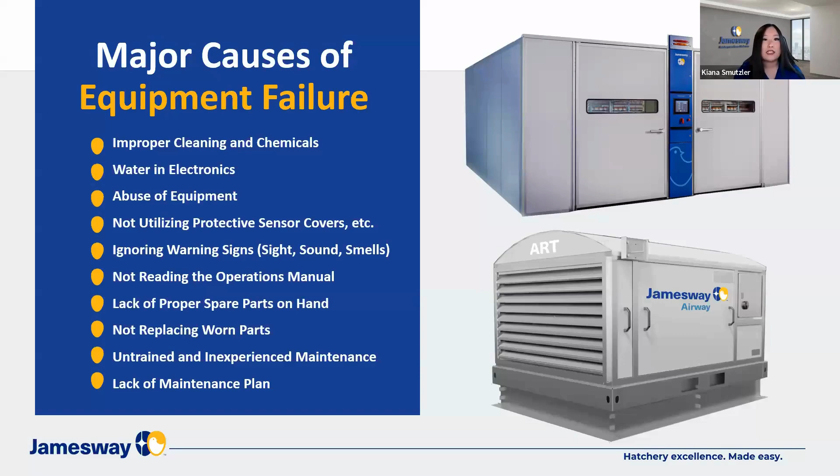With that, not only is there potential for a significant financial impact to the business, but there's also a higher likelihood of damage to chick quality and hatch performance when some of those issues take place. From a financial aspect, we're looking at costly service visits, rushed part deliveries, sometimes leading to staff overtime and operational inefficiencies because these problems take place during operational hours.

And what those inefficiencies and that downtime really feed into, that we are really trying to prevent every hour of the day that we're at the hatchery, is compromised chick quality and/or the loss of hatchability.

This can lead to unplanned outsourcing costs for day-old chicks or general incubation services so that we can be meeting the needs of customers. Unplanned outsourcing - the empty machine may force a hatchery to go elsewhere to find day-old chicks or hire incubation services, really leading to those unexpected expenses.

And with this, we cannot guarantee 100% that there's not going to be bouts of downtime, but what we can guarantee is significantly reducing this with a proper maintenance plan. So what I'm going to go into is what we see most commonly: we have reactive maintenance and preventative maintenance, which I'll touch on in just a second.

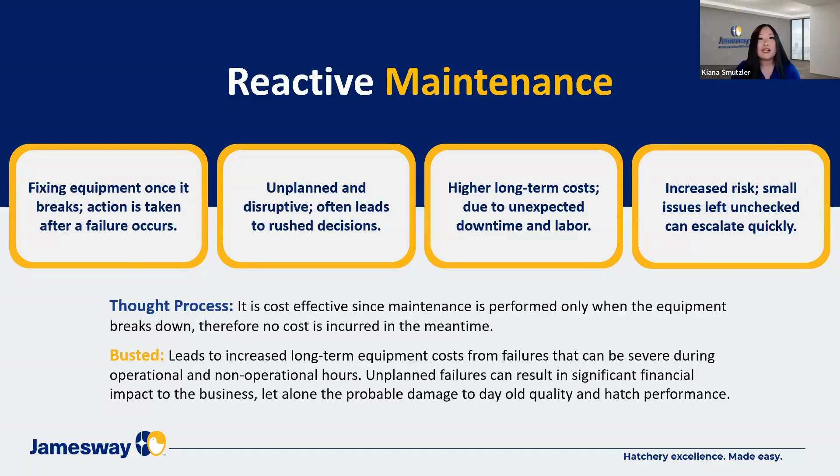Generally, what I have been told by customers is that it is more cost effective to do reactive maintenance. They will say, we do reactive maintenance and we are proud of it, because maintenance is only performed when the equipment breaks down. So we're not incurring costs in the meantime, which means it should be more affordable.

Unfortunately, what I think we're failing to see is the long-term damage and the costs that are racked up when that equipment does break down. I know that we're maybe not tracking it to the same degree, but really what this means is it leads to increased long-term equipment costs.

Not only from the failures that can be severe during both operational and non-operational hours, those unplanned failures can result in significant financial impact to the business. So we're thinking, oh, it only happens every now and then, we're not incurring that much cost. But even if they are periodic, that time when equipment goes down can have devastating consequences, let alone the probable damage to day-old quality and hatch performance.

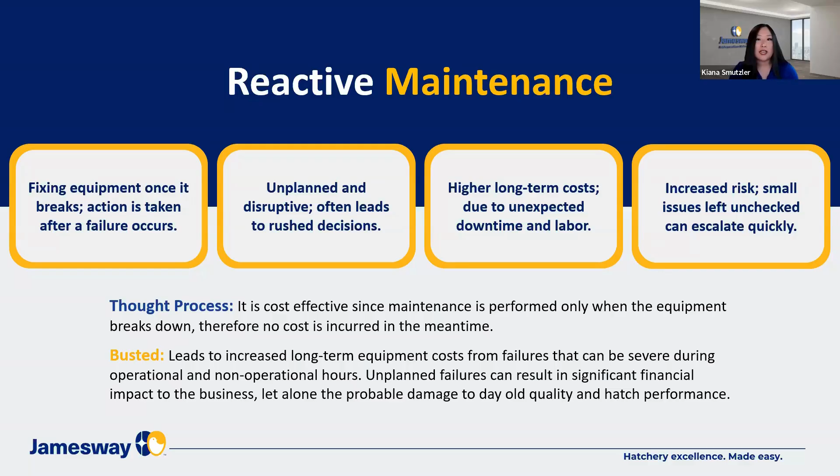So what can we do instead? For a majority of today, we are going to be talking about preventative maintenance. This means having routine checks and servicing performed on a scheduled basis. It reduces unplanned downtime and allows you and your teams to identify and address issues. So what we're looking at is extending equipment lifetime, preventing premature damage that could be prevented, and improving consistency, which supports both performance and reduced stress for you and your team.

Preventative maintenance is important. We do have a generational change in management, maintenance, and general labor taking place at this period of time, especially across North America. Specifically, we see multi-stage incubation equipment that is over 45 years old on average. So these machines, they are great, but they need a team to be able to support them like all things do.

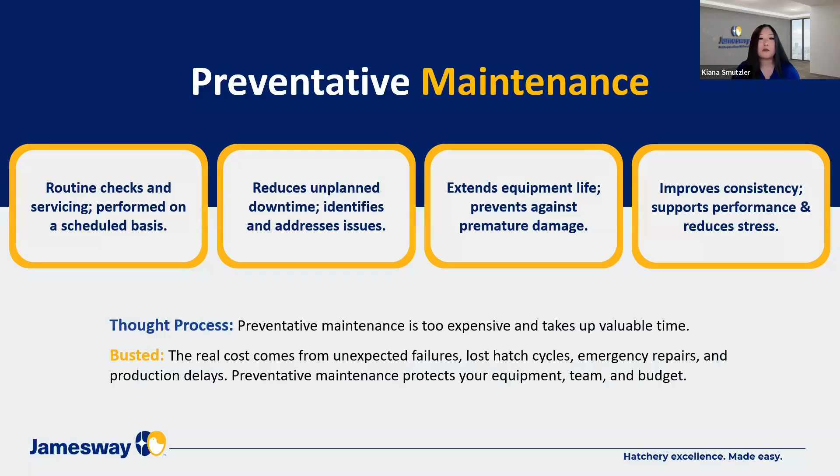The thought process with preventative maintenance, what I've heard from customers all over is, well, preventative maintenance is too expensive, we have to hire on someone just to do that, it takes up valuable time. But really, the real cost comes from those unexpected failures, the lost hatch cycles, the emergency repairs, and those delays in production. So what we're going to do with preventative maintenance is show you how you can implement small changes to be able to work towards a strong preventative maintenance program to protect your equipment, your team, and your budget.

So with this, we're going to go over a high-level overview of some preventative maintenance aspects and features that we can begin implementing. Again, this is from a high level -- we do have a variety of equipment, different ages, different teams, different skill sets. So afterwards, absolutely reference some of the materials I'm going to mention, like the manual for your specific machines. We also have support teams here at Jamesway, myself included, and Mike and Ronald and our consultants. We have so many great and strong, knowledgeable teams, so we can help get this down to something more exact for your facility.

Let's look at general preventative maintenance and how we can build that in. First, with incubators, after every set and wash, there are general checks that should be done, including calibrations like CO2, temperature, humidity, etc.

Along with that, perform regular checks on the machine by manually activating different systems—heating, cooling, opening and closing those dampers, checking your alarm systems. It's not something you need to spend 10 minutes on each item, these are pretty quick checks.

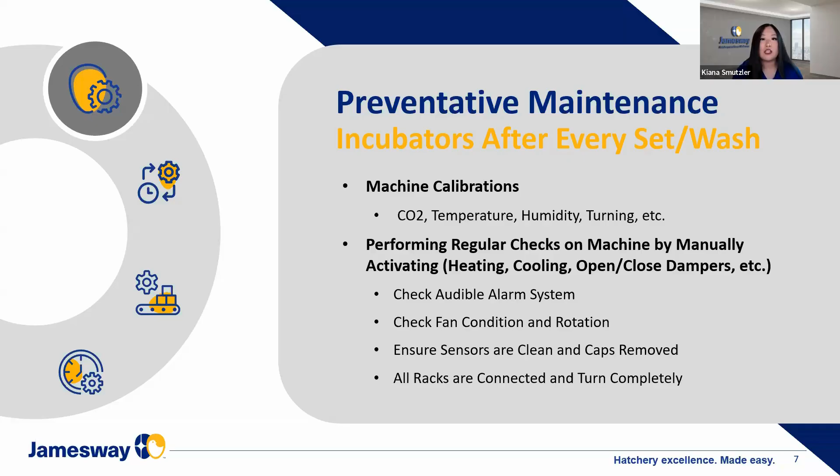But again, getting your hands on and seeing that machine matters. We want as much face time with that machine as possible, so that when something is out of the ordinary, we understand what normal should be. So just some general checks here with the incubators, regularly after every set and wash.

When we go to our hatchers, we're looking at this from a monthly perspective. But the one thing I really want to point out is the door gasket condition—that's weekly. They should be inspected weekly because they're subject to so much use. With transferring, hatching, and cleaning twice a week, they are more likely to become worn. That tight door is crucial for maintaining the necessary temperatures and humidity levels within the hatcher for optimal development and hatching.

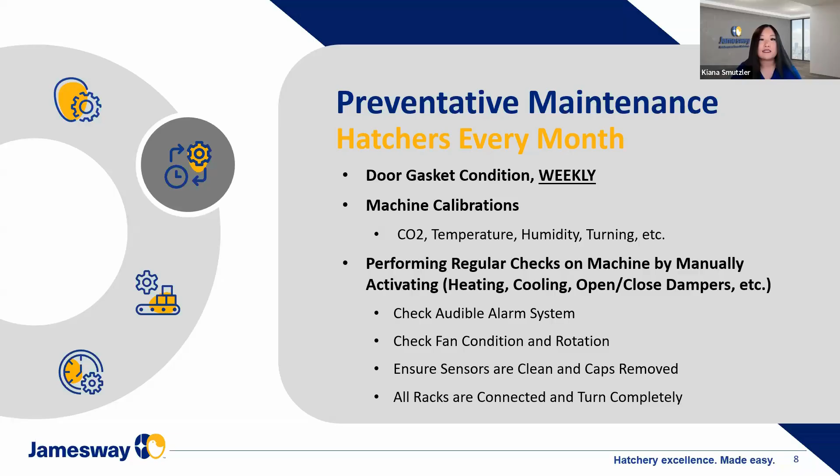Everything else here is pretty standard, similar to what we'd recommend for the incubators. But again, on a weekly basis we should be checking that door gasket condition, making sure we're getting a tight seal on our hatchers.

We should also be doing preventative maintenance on both of these machine types on a quarterly basis, so about every 3 months or so. Being able to schedule these out and spread it through the week or month can make some of these items more attainable.

I know you might think, oh my gosh, doing this every quarter, I have to do this report, we have to do this. But there are small, practical ways to build this in by spreading it out and planning it out, so we're not dealing with something unexpected that takes up a much more significant amount of time and resources.

Before doing any work with our control box, make sure the power is switched off, then get in there and analyze—is everything clean? Is it dry? All of this can have different impacts on your machines.

When we start doing this consistently on a regular basis, you'll see it doesn't take that much time to do these checks. What takes longer is if we only get to it every year, or every couple years, or whenever we have to—that's when we see a lot more buildup, more control boxes that need cleaning, or more significant damage that takes up the bulk of your time.

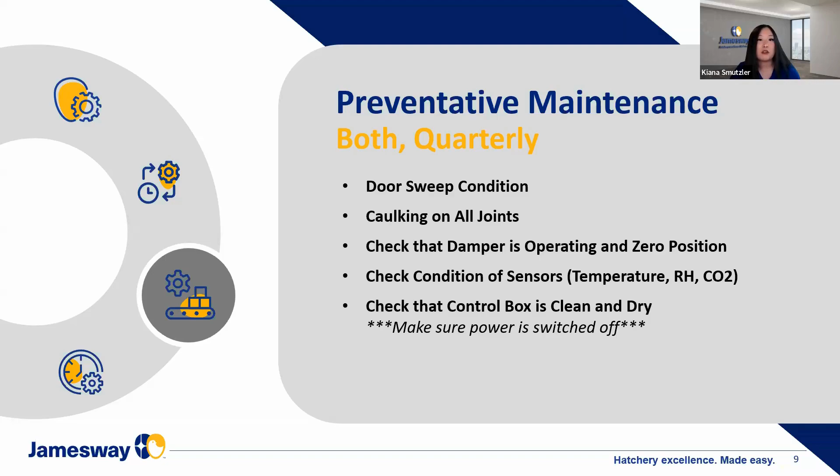But as we stay consistent, going into semi-annually, about every 6 months or so, let's make sure the doors are latching properly, and get a little deeper on some of these checks—testing our water quality at the hatchery, making sure the pivot points on the trolleys are greased and oiled, and doing a full technical check.

According to those manuals, we have those for all of our different machine types. If that's something you don't have, maybe you lost it and don't know where to find it, please reach out to our team. We'd be more than happy to provide these manuals for your specific machine types so we can get more exact on what those checks should be and what this maintenance program should look like for you.

Today we're going to talk a little more about the setters, the hatchers, your HVAC equipment, but all preventative maintenance should be done on a regular basis, also for automation and for all of the different equipment that is in the hatchery.

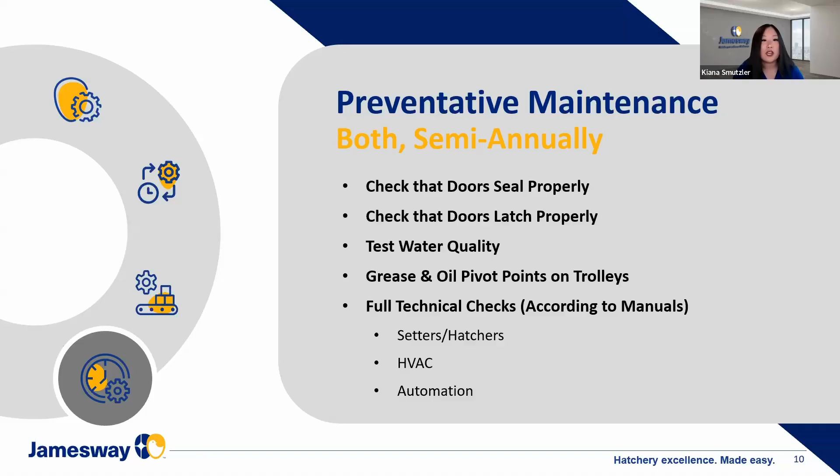So I'll go a little bit more into specifics on what we can do for you, but just keep that in the back of your mind. We should be building in programs for all of our equipment to make sure we don't see any issues. So now we're going to start breaking it down a little further.

What are some large key steps that we need to do to begin a preventative maintenance program? This might be if you're starting from nothing, if you come in and say we sit there and wait, and then when something happens we go address it, with nothing being done in the meantime to set ourselves up for success. So let's go through this.

First, we need to take an inventory of that equipment. Create a full inventory of all the critical equipment and the parts that go with them. Review knowledge of your service history - if you have anything down on paper or in your computer, that service history is extremely important, especially with the long lifetime of these machines, so that you can prioritize focus areas for where that preventative maintenance should take place. But overall, let's get an inventory taken down of our equipment and our parts.

Next, we're going to develop checks and routines. We're going to build a structured plan based on daily, weekly, and seasonal tasks, similar to what I just spoke about - using manufacturer guidelines as a starting point, and then being able to tailor it to your specific conditions and needs. Every team, every facility is a little different, so use this as a guideline, but not everything has to be structured exactly as we outline it. You have a little bit of flexibility to work this into what is most practical for you.

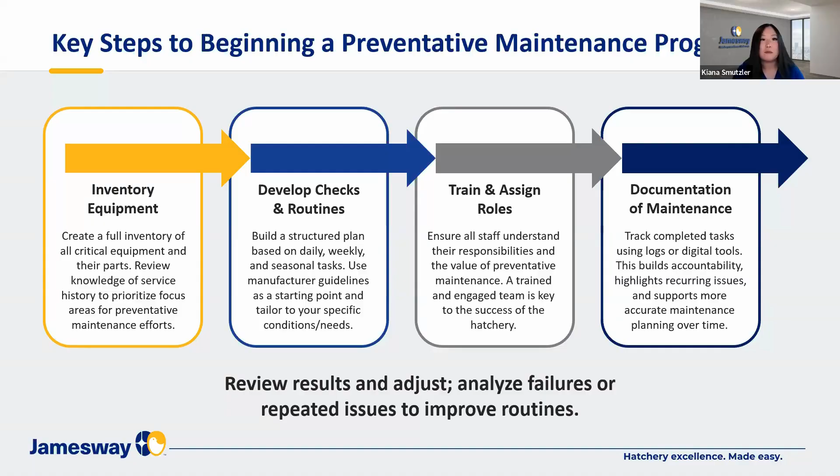Again, just following a piece of paper and saying, okay, that's preventative maintenance - you're not going to see the full benefits. We really have to build this into our day-to-day, and sometimes we need to pivot and say this piece of equipment needs more attention, we should be doing this every 2 months instead of 3 with certain items. Being able to customize this to you is critical in building something that's really practical and lasts you the long term.

Unfortunately, they're going down at 2 a.m. They're going down on Christmas. They're going down at these unpredictable times. And the last thing we want is for it to be a quick spare part change and we don't have it, or we don't even know where it could be found.

Really reliable hatchery operations depend on quick access to the correct parts. Even minor delays in replacing a failed component can lead to unplanned downtime, interrupted hatches, emergency repairs, lower chick quality, and have a high impact on hatchability.

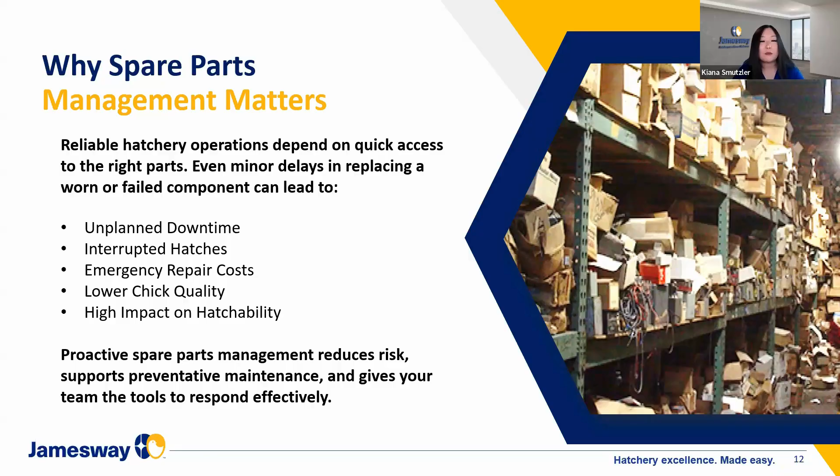Even if you come to us urgently needing something shipped out as soon as possible, and we get it turned around next day, that delay when the machine is down, especially with eggs in it, can have devastating consequences. So proactive spare parts management reduces the risk, supports your preventative maintenance program, and gives your team the tools to respond effectively.

So what are some of the best practices for spare parts management as a whole? It begins with simple, consistent habits. First, we organize our storage—designate a secure, organized storage area for your parts so we prevent damage or loss of these items.

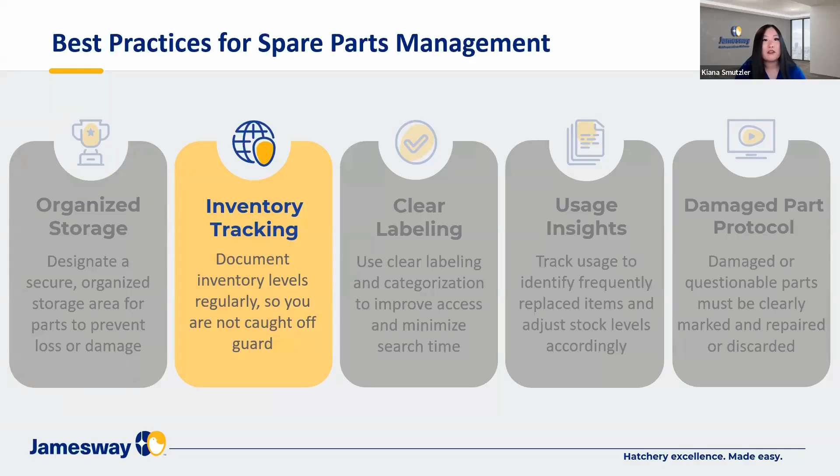Next, we look at inventory tracking. All too often we get calls from different hatcheries saying, this is important, we need this now. So what we propose is really tracking that inventory, documenting inventory levels regularly so you're not caught off guard thinking you have an extra motor when you don't. It's critical to building a program you can depend on.

Next, once you have all your inventory tracked and in a secure, organized spot, we need to go through and start doing some labeling—using clear labeling and categorization to improve access and minimize search time.

Within our manuals and programs like 360, we have guided diagnostics to tell you exactly how to troubleshoot. But if we don't have an understanding of what our parts are, we look at all of them and it doesn't make a difference to us if that's a PB6001 or a damper motor. You need a general baseline understanding. Our team can support you in identifying spare parts and their numbers, but we do need clear labeling and categorization for those parts.

As we get more comfortable taking these steps, we can start getting a little more detailed—tracking usage to identify frequently replaced items, adjusting stock levels, and similar items.

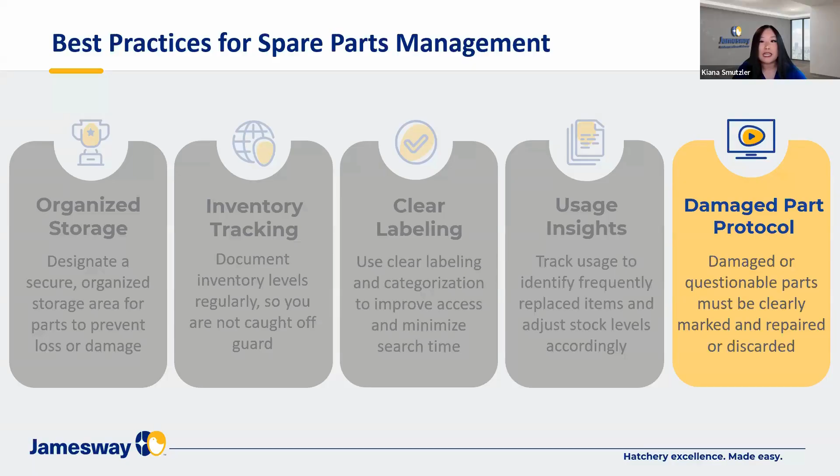Keeping your storage and spare parts clean, and your records current, lays the groundwork for better planning and faster responses to unplanned issues.

If you're just beginning to build up your inventory, focus on the most important parts first. That means starting with the critical spare parts—components that, if they fail, immediately impact your operations. So we're looking at sensors, fans, belts. That's going to look a little different depending on your machine type.

Next, analyze the parts with a longer lead time, things that take weeks or months to arrive—order those in higher quantities or on a regular basis so we're never waiting for that item to come in. If you have no idea where to start with what is a critical part, you can request a critical parts list from your equipment provider. For us, that would be emailing support@jamesway.com to ensure nothing is overlooked.

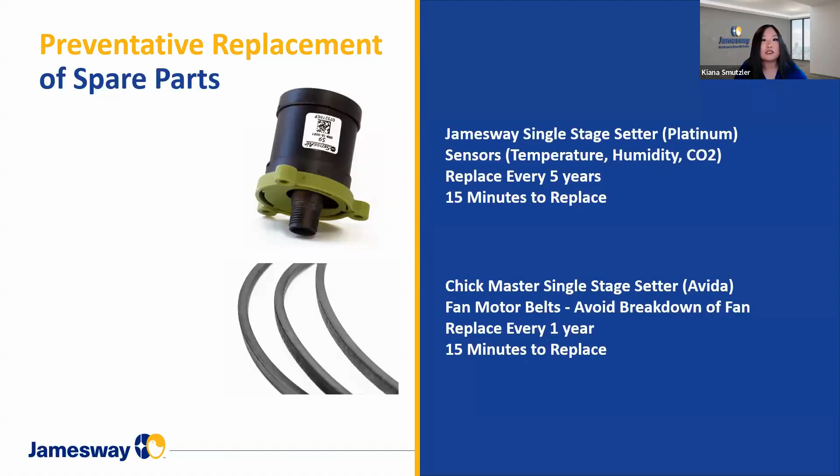They take minutes out of your day. You can break this out. We want to get all of these done by the end of the week, the end of the month, but it gives you and your team that flexibility to control. We are scheduling this and replacing this, because losing it would cause a critical loss of function to our machines.

So again, going over a couple more items. Something as important as a door sweep, we want to ensure airtight incubators, or inclinometers. If we replace this every 5 years or so, each part has a different predicted lifetime based on manufacturer recommendations. But if we get into a routine, replacing the most critical parts when they need to be replaced, on our terms, and we can schedule this, we're ensuring the best use of our machines, the best results, and the least amount of downtime possible.

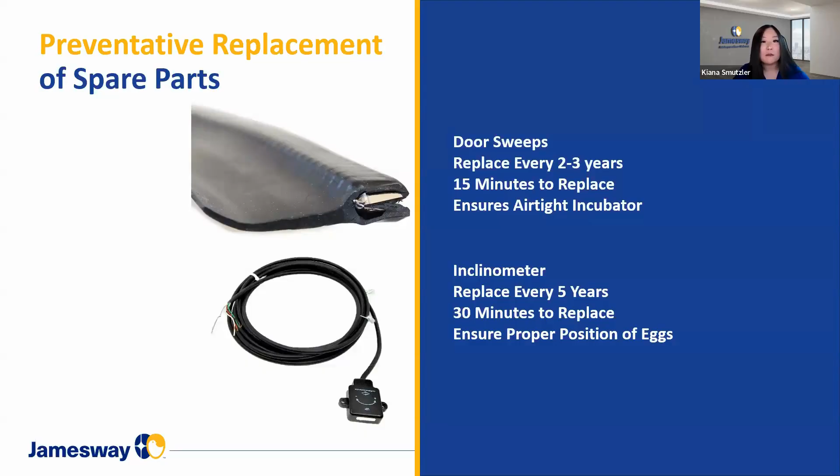So now that you have all of your parts set up, you have a general understanding of what you have, when you're going to be replacing this, and a general guideline on some checks you're going to be doing regularly. The next step is really building up our personnel and being able to take accountability.

So first, we want to assign roles. It needs to be defined. It needs to be built into daily routines and not just left for when there's time at the end of the day, because there's always going to be stuff that comes up, and always things that different people debate on what's important. So we need to build this in as a standard, not as an afterthought.

With that planning, we do have digital tools, logs, and calendar-based schedules to ensure that you can maintain consistency across your daily, weekly, and seasonal tasks.

With training, let's train new personnel with hands-on instruction, key routines, and review of the manuals to ensure proper practices. I'll say, you've probably heard this from one of our consultants as well: 90% of all issues can be solved by reading those manuals. We do have digital versions of these, so it allows for easy searching and looking up keywords. There's a nice table of contents in there. These manuals have so much critical information.

So when we are looking at training new personnel, especially if you don't know where to start this training process for your maintenance team, starting at the manuals will never steer you wrong. It's always going to be a great foundation of success for you.

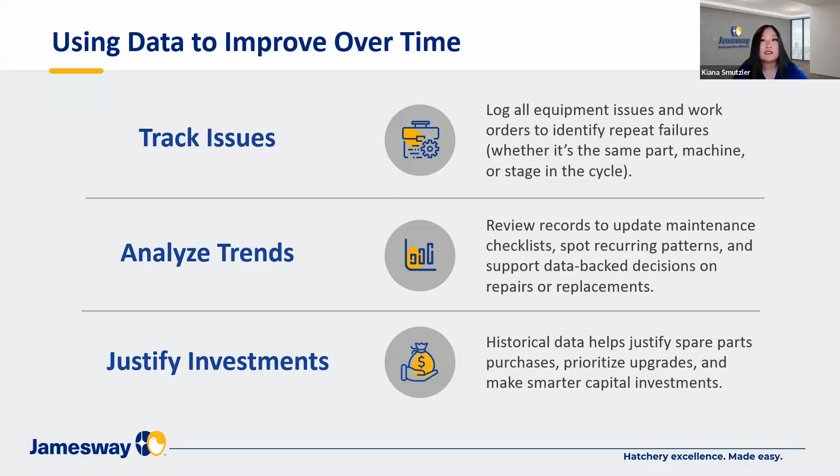So all of these items feed back into why, at the end of just about every topic, I say you need to be logging this. We need to be putting this down somewhere so that we have reference to the history of maintenance that's been done on these machines.

After everything we just went through, I know it sounds like a lot. You can take it step by step, making small changes that you'll thank yourself for down the road. But if you don't feel your team is equipped, or you don't have tools within your hatchery or company to support maintenance, I'm going to go over one built custom for you and our equipment.

Overall, digital tools as a whole have significant advantages. There are gaps in manual processes. If we're relying on our team to do every single thing by hand, every detail needs to be logged and looked at, which can become overwhelming. Manual processes can be inconsistent, tasks can get skipped, forgotten, or done without documentation, leading to gaps in care and accountability later on.

With digital platforms, we're looking to solve these issues by providing scheduled reminders, interactive checklists, and real-time notifications when a step is skipped, all accessible from a mobile device, tablet, phone, or computer, with digital backups in other locations. Overall, what we're looking for is increasing visibility. Clear task tracking and accessible records let digital systems create transparency across your teams and help ensure critical maintenance actions are always completed on time.

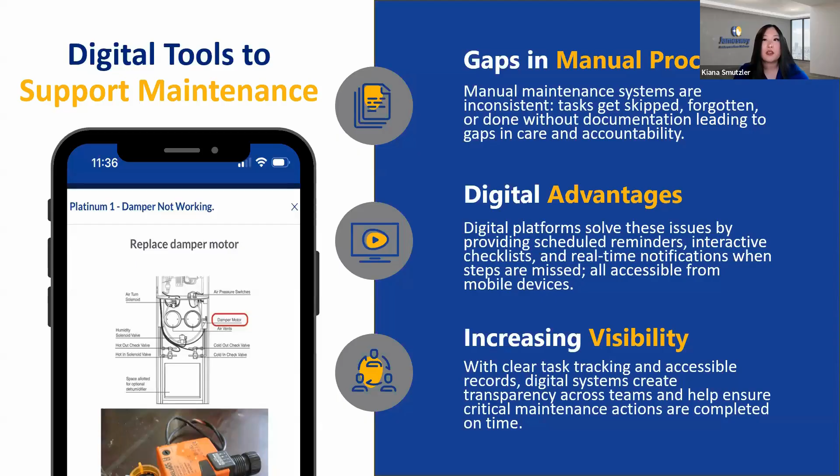So I'd like to introduce, we touched on it for a second, 360. This is our response to all the issues and obstacles our customers have run into. 360 is Jamesway's own digital platform, hosted on the Microsoft Azure cloud. This means each customer has their own portal that's custom, safe, and secure. I'll touch on some of the functions 360 has to help address the gaps you might be seeing in your own maintenance program specifically.

Right now what we're looking at is the custom dashboard, with different items you find important to your day-to-day processes. Currently it's set up to look at our maintenance tasks, top usage on machines, items low in stock, and overall work orders for the month.

This automates some of the processes we just spoke about, giving you reminders, keeping track of inventory and notifying you when items are low in stock, and telling you exactly where you're spending your time with machines, especially with bigger teams where different people may be working on different machines. We can't always rely on everyone meeting up and talking about what they did that day. We need a log, and we need to quantify these numbers and results so we can really analyze the best use of our time.

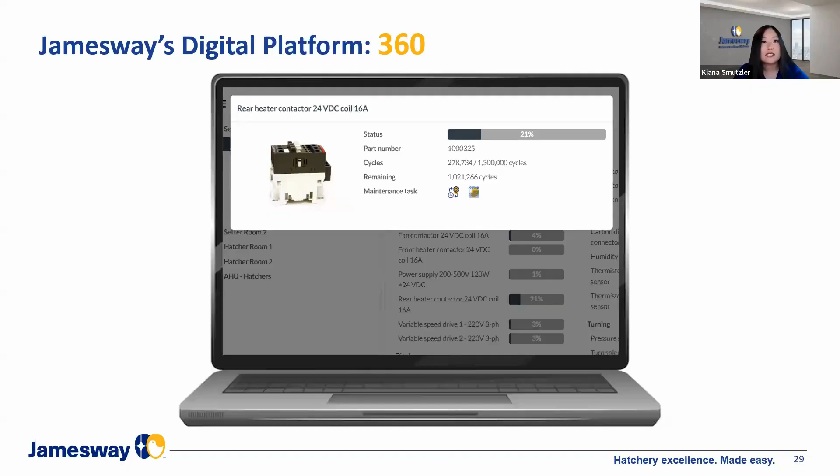With this, the status is going to be updated automatically, sending you reminders telling you the amount of time you have left for each part. This is not something you need to manually track, especially over a course of a year, like some of our sensors that need to be replaced every five years. This will give you the reminder when that comes up, because we know things with that long of a life cycle can be complex to track, especially with turnover on our teams.

Next, 360 has intuitive different processes. With these work orders, it's actually going to create a work order for you, notify your team that this needs to take place, and put it in your calendar. So again, spending less time on pen and paper, assigning out everything that needs to be done for the day. We want to give your team more time to be hands-on with the machines, not just sitting behind a desk logging everything. So 360 will automatically come with these work orders and reminders on different items pertinent to your machines.

The last item in regards to maintenance I really want to close in on is guided diagnostics. If your team has varying levels of experience with our machines, 360 can take you through that troubleshooting process. I know some of our consultants have been called out to items that have been sitting there for weeks, problems customers don't know how to respond to. So we wanted to provide a tool to help address these troubleshooting needs quickly and on your own time schedule.

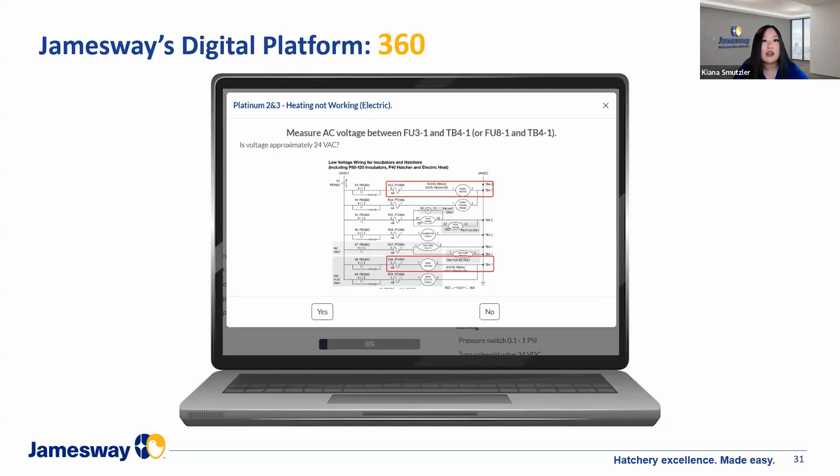For example, on either a Platinum 2 or 3 machine, the heating was not working. 360 will take you through guided diagnostics, asking you to measure the voltage between certain areas, lay that out on a diagram, and take you through the troubleshooting process. Let's say a damper is not working—it doesn't necessarily mean the damper is the issue; it could be a variety of different sensors or calibrations that need to take place. So 360 will take you through this, reducing the costs you're spending on parts that are not being used or other items along those lines.

Some key takeaways: top performing hatcheries, regardless of their age or size, always have an effective preventative maintenance program. This doesn't mean you have to be the largest hatchery with the largest team. One customer I work with specifically on 360 is starting from the ground up—they have a very small team, don't have people there 24/7, and have built an incredible program because that team has been very intentional and interactive with the platform, making the best decisions possible for them. It's fantastic to see the progress that can be made.

Routine maintenance is foundational for reliability, budgeting, and peace of mind. Regardless of your size, age, or location, a hatchery is only as good as the preventative maintenance programs in place. Preventative maintenance isn't just about avoiding downtime—it's about building a hatchery that runs smarter, lasts longer, and performs better. So start small, stay consistent, and remember that the best time to act is before anything goes wrong.

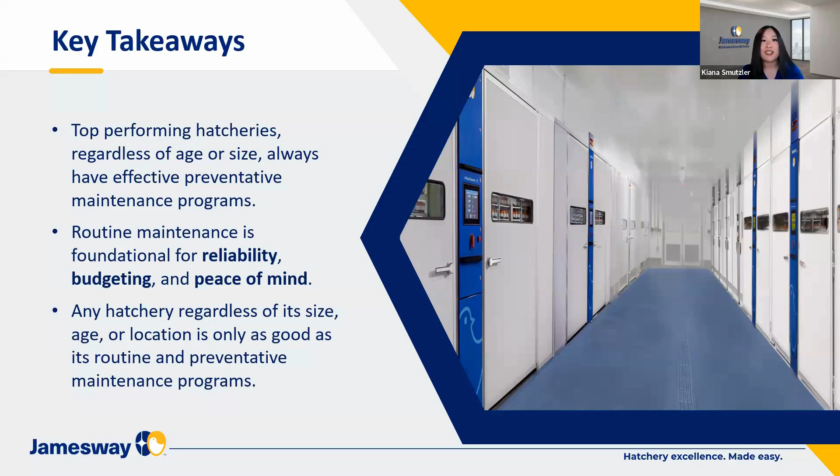And that is my last slide for you guys.

Thank you very much, it was enjoyable. You can unshare your screen now so we can see more of you. Fantastic.

Thank you very much. You put things together in a very organized fashion, building upon the 360 app. It does a lot more than maintenance, but I think we've all agreed that's a huge thing. In your dealings with customers, how important is it to have a planned routine maintenance program? How often do you see people not having that, and how much can this help?

Unfortunately, we see a lot of customers that do not have a planned maintenance program. Every time, maintenance supervisors tell me this is something we'd love to have, but we don't have the people, the knowledge, or the resources to do this. So it's important to recognize you can start making small changes. We're not saying you need to overhaul everything today, it needs to start with small changes. That's why one of my favorite things about working with customers on 360 is we can see where they are starting and build on that.